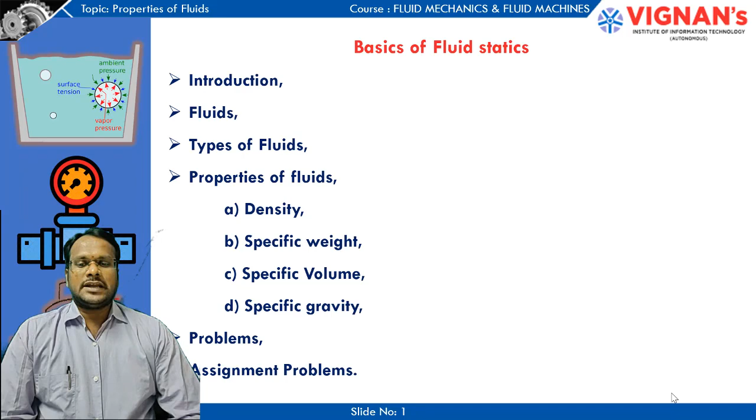These are the topics which we are going to cover in lecture number 2: the introduction of properties of fluids, introduction of fluid statics, definition of fluids, the different kinds of fluids, the properties of fluids, a simple problem and an assignment problem. In the properties of fluids, we are going to cover density, specific weight, specific volume, and specific gravity.

Coming to the introduction, fluid mechanics. Fluid mechanics is the branch of science which deals with the behavior of fluids which are at rest as well as in motion. The fluid may be a liquid or a gas. Fluid mechanics is classified as fluid statics, fluid kinematics, and fluid dynamics.

Fluid statics is nothing but the study of fluid at rest condition. Fluid kinematics is the study of fluids in motion, where the pressure forces are not considered, whereas fluid dynamics is also the study of fluid in motion, but the pressure forces are considered.

In fluid statics, there is no motion of the fluid. There is no motion between the layers of the fluid, and no shear stresses are generated between the layers. Fluid kinematics deals with velocities, accelerations, and patterns of flow, whereas fluid dynamics deals with velocities and accelerations of fluids with the force or energy causing them.

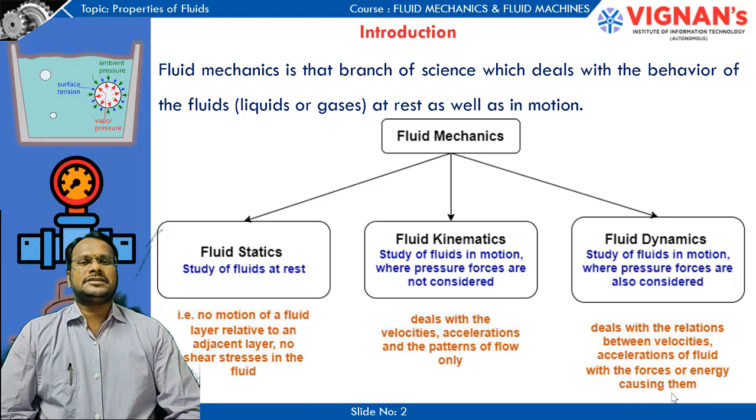When it comes to the definition of a fluid, a fluid is a substance which is capable of flowing and deforms continuously when subjected to an external shear force. It mainly has the capability to flow, and it deforms continuously when subjected to an external shearing force.

The basic characteristics of a fluid are: it has no definite shape, but it conforms to the shape of the containing vessel. Even a small amount of shear force can cause it to undergo a deformation which continues as long as the force continues to be applied. So these are the two basic characteristics: it has no definite shape of its own but conforms to its vessel, and even a small shear force will cause it to deform continuously as long as the force is applied.

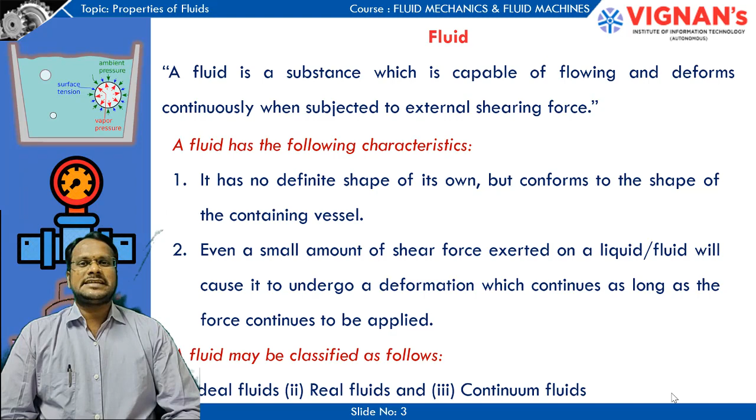A fluid may be classified into three types: ideal fluid, real fluid, and continuum fluid. No ideal fluid exists in nature; that is why we term it ideal. When it comes to real fluids, yes, real fluids exist and are available in nature.

Continuum fluid: a continuous and homogeneous medium is called a continuum. Ideal fluids have no viscosity, no surface tension, and are incompressible. Water and air can be treated as ideal fluids under certain conditions, whereas real fluids are viscous, have surface tension, are compressible, and have a certain density. For continuum fluids, the overall properties and behavior can be studied without regard for the molecular and atomic structure.

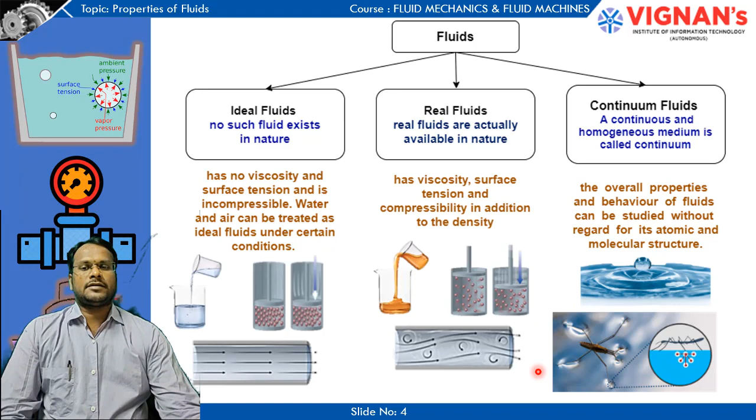Next, here the density. Fluid mechanics property density is also called mass density. It is the ratio of mass of fluid to its volume. Ratio of mass of fluid to its volume. It is denoted by rho. Symbol rho. The SI units are kg per cubic meter. Mathematically, it can be written as mass of fluid per unit volume of fluid.

The density of liquids may be considered as constant, while that of gases changes with variation of pressure and temperature. The value of density of water is 1 gram per centimeter cube or 1000 kg per meter cube.

Here the picture clearly shows different densities of different liquids. Here you can see there is honey. It is very viscous. Here you can observe some soap liquid. Here you can observe refined sunflower oil. Here you can observe some other different density liquid. So these are not going to mix with each other because of their density.

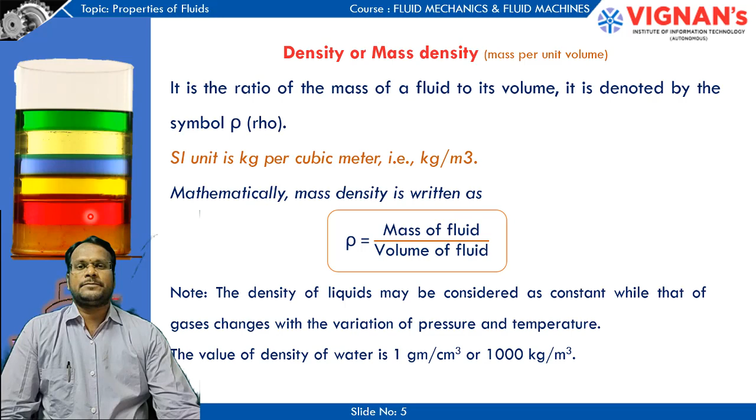Next comes the specific weight or weight density. Specific weight is also named weight density. It is the ratio of weight of fluid to its volume, and it is denoted by a small w. The SI units are Newton per cubic meter. Mathematically, it is written as weight of fluid per volume of fluid.

We can say the weight of fluid is nothing but mass of fluid multiplied by acceleration due to gravity. We already know that density is the ratio of mass of fluid to the volume of fluid. So here we can observe there is a mass of fluid and a volume of fluid. These two together are called density. So finally it is density multiplied by acceleration due to gravity. The value of specific weight or weight density for water is 9.81 into 1000 Newton per meter cube.

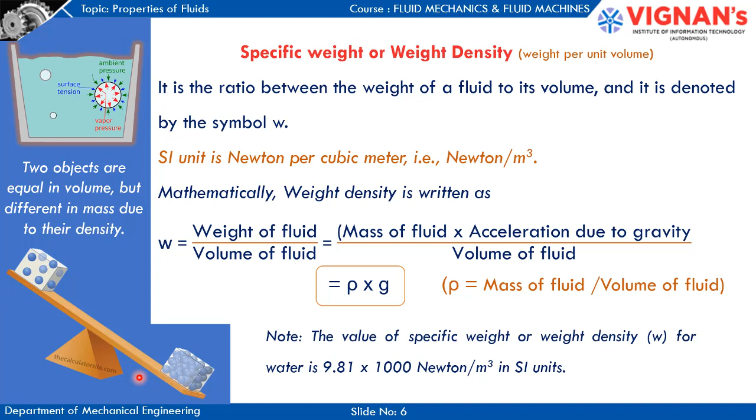Here you can observe the picture. There are two objects placed which are equal in volume but different in mass due to their density.

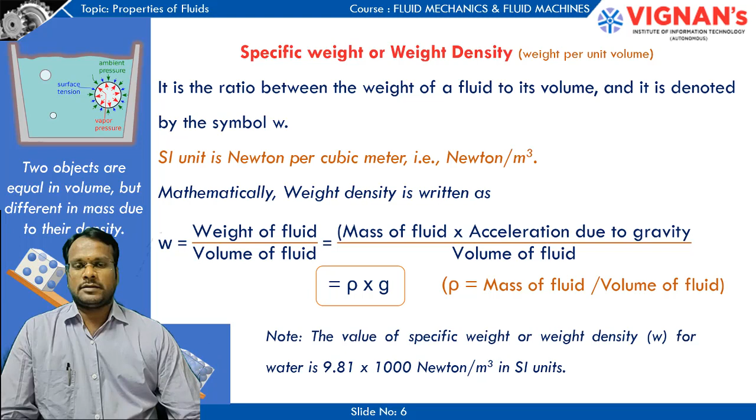Next, specific volume. It is the ratio of volume per unit mass. Specific volume SI units are cubic meter per kg. Mathematically, it is the ratio of volume of fluid per mass of fluid, which you can observe is the reciprocal of density. So we are writing it as 1 divided by mass of fluid per volume of fluid, that is 1 by rho. It is commonly applied to gases.

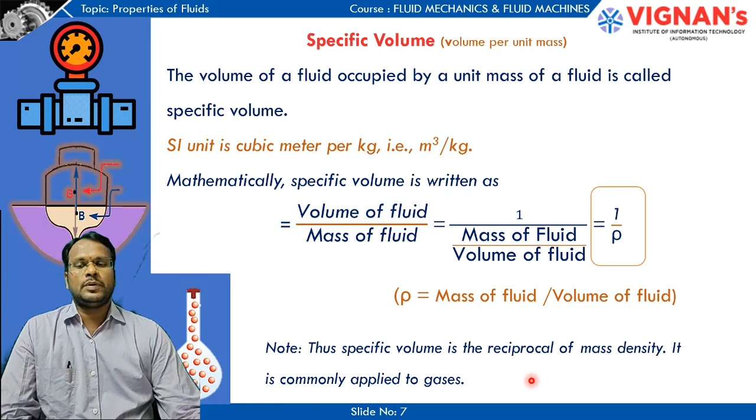Next, specific gravity or relative density. Specific gravity is also termed relative density. It is the ratio of density of fluid to the density of standard fluid. It is a dimensionless quantity as the numerator and denominator are both densities, and it is denoted by symbol S. For liquids, the standard fluid is water. For gases, the standard fluid is air.

You can see specific gravity for liquids equals weight density or density of liquid per weight density or density of water. For gases, weight density or density of gas per weight density or density of air. So this is for liquids, this is for gases. For gases, the standard fluid is air. For liquid, the standard fluid is water.

Weight density of a liquid is equal to specific gravity multiplied by weight density of water, that is specific gravity multiplied by 1000 into 9.81 Newton per cubic meter. The density of a liquid is equal to specific gravity multiplied by density of water, that is specific gravity multiplied by 1000 kg per cubic meter.

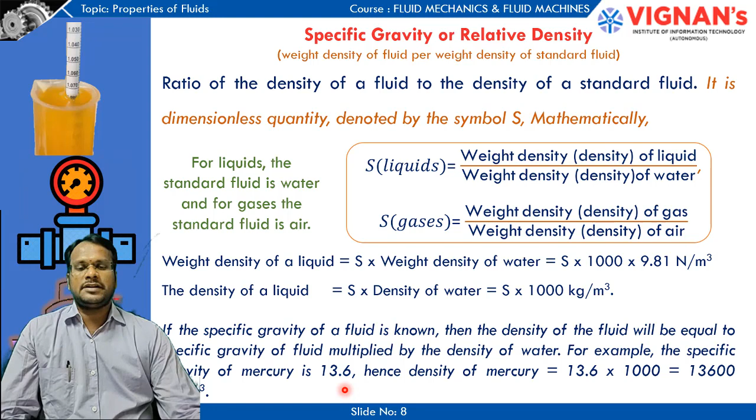We can see a simple problem. Calculate the specific weight, density and specific gravity of 1 liter of a liquid which weighs 7 Newton. Here the given data is 1 liter and 7 Newton. 1 liter is volume, 7 Newton is weight. Here weight is 7 Newton and volume 1 liter, which is equal to 1 by 1000 cubic meter.

So calculate specific weight. What is specific weight? It is the ratio of weight to the volume. What is the weight here? 7 Newton. What is the volume here? 1 by 1000 cubic meter. So the specific weight is 7000 Newton per cubic meter.

Next, density is the ratio of mass per unit volume. What is the mass here? We have weight 7 Newton. So mass is 7 by 9.81. Volume 1 by 1000, which gives 713.5 kg per cubic meter. Next, specific gravity. Density of the liquid we already know, and density of water, which is standard. So 713.5 divided by 1000, which is 0.7135.